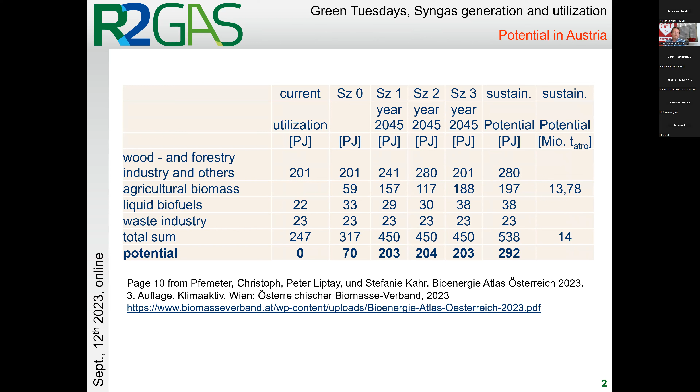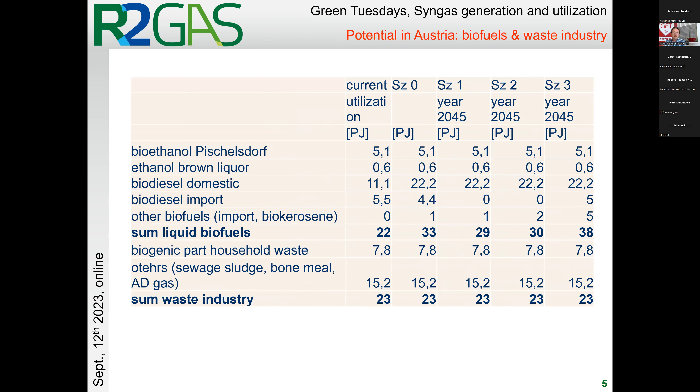The following slides are just details. This means the sectors are shown here: wood and forestry, industry and others, agricultural biomass, liquid biofuels, and the detailed estimation you can see on the following slides. There's 3 slides, and the conclusion is that we can at least provide 20% of additional bioenergy in Austria.

This would mean, if you're talking about gasification, because this is the topic we have today, between 145 and 200 plants of syngas conversion plants are required in Austria. And from my point of view, that's feasible.

I took into consideration 50 megawatt plants when drawing up the numbers here, about 200 plants which can be built in Austria. This is the first section about the potential.

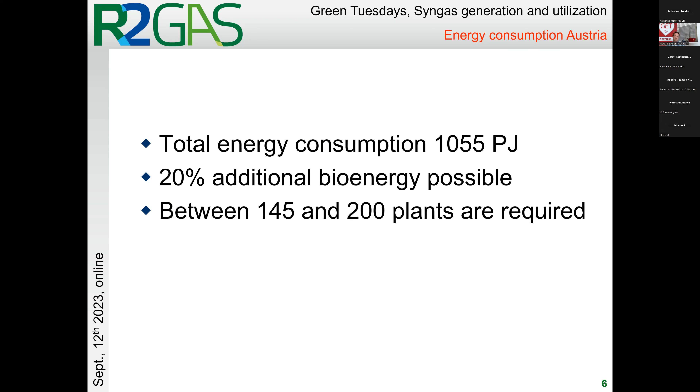The next section is about technology - interesting projects. At the beginning, I'd like to show you a slide to help you understand how it works to implement technologies. It's always about R&D.

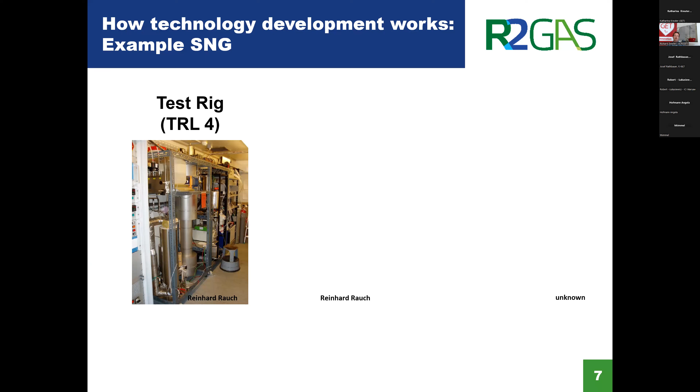If you're talking about a simple example, like the synthetic natural gas plant developed mainly in Güssing - we had a test rig at the beginning on technology readiness level 4. The next step was to build a demo plant in Güssing, technology readiness level 7, and the industrial plant was then state of the art - technology readiness level 9, which has been installed in Göteborg.

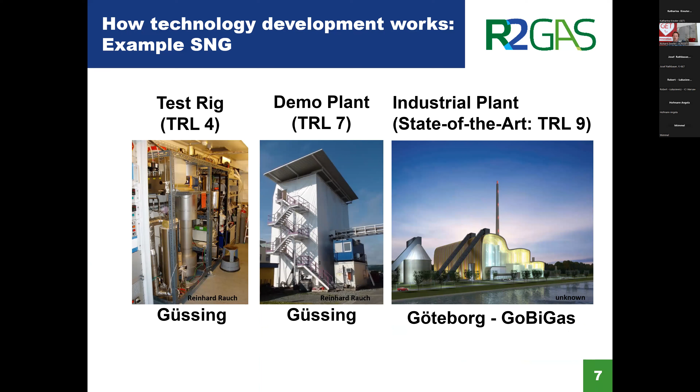If you're talking about the schedule, it always takes, let's say, 10 to 15 years once the process is invented in the laboratory until the final demonstration plant is built. In the case of this process chain from Güssing to Göteborg, we had rather good luck because it was financed. Usually, for other technologies with ideas at least as good as the SNG idea, we have to apply 3 or 4 times in Horizon, and there's a delay of 4 or 5 years for each project stage. So if you're relying on financing as available in Europe, it's not 10 years - usually it's 20 years to make a technology ready.

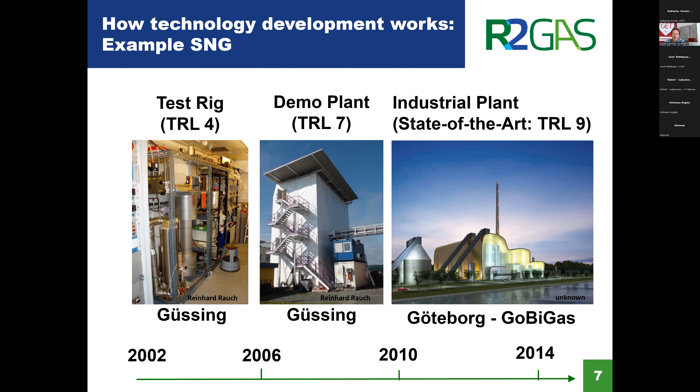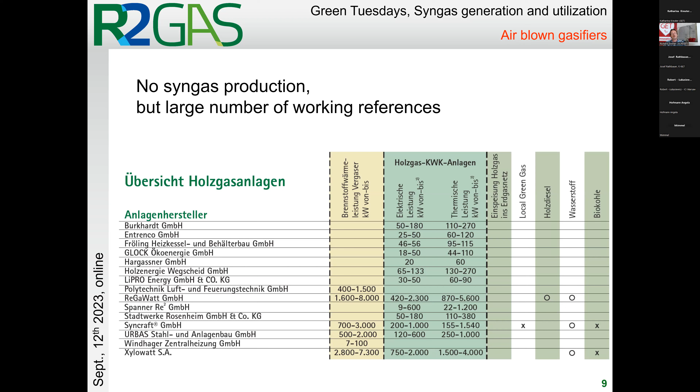Now let's come to the detailed technologies. As I mentioned before, Christian Aichernig is already in the meeting, and he will just extend something. So if I forget some information, or if you find something useful is missing for the audience or our colleagues, please make a break and add this information, Christian.

One plant worth mentioning was the Agnion plant. The idea was interesting - it was about heat pipes which transfer heat into the gasification zone, a lithium-based heat pipe where heat has been collected in the combustion zone and introduced to the gasification zone. It took some time until this plant was installed. For this reason my idea was also to make a summary about the previous technologies and the still existing technologies. Of course it wasn't possible to include every plant.

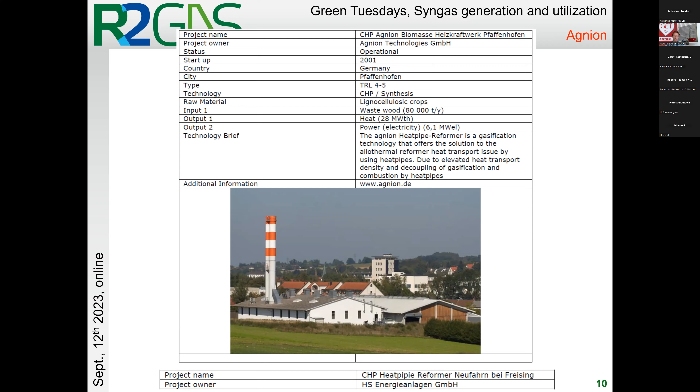The latest development in the field of dual-fluidized bed technology has been the plant in Wien-Simmering from Bioenergy and Sustainable Technologies, built by SMS Simag. For my personal part it's a very sad development, because the site in Güssing has been shut down and all the equipment moved to Wien-Simmering. But it was a good step for the technology, because what was demonstrated at a small site in Burgenland for just 4,000 inhabitants is now demonstrated in Vienna. I think it's a perfect site, because the wastewater treatment plant is included there, also the AD plant. And BEST is now really speeding up with demonstrating technologies like Fischer-Tropsch.

We had a common EU project, the Horizon project, where we installed the first continuous aqueous phase reforming reactor all over the world in Wien-Simmering, and made a successful demonstration of the entire process chain, combining the dry route from gasification with the wet route, where we can process nearly everything via hydrothermal liquefaction combined with aqueous phase reforming. So for this reason, research is expanding a lot in this field.

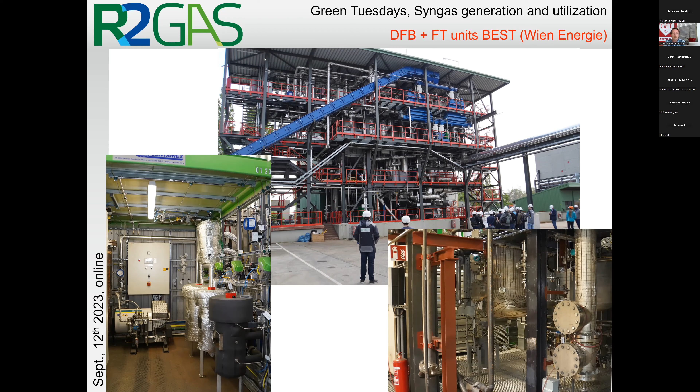Another example, maybe not too well known, is listed in the publications of the Austrian Biomass Association - the plant in Nongbua. This was from one of our close cooperation partners, Güssing Renewable Energy, and it was a successful demonstration in Thailand of a combined heat and power plant.

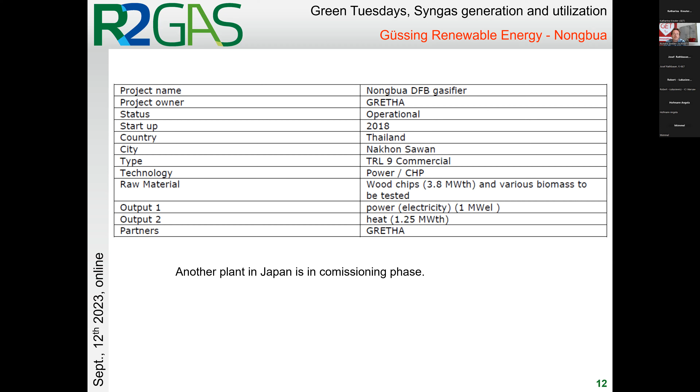Güssing is maybe known, as I said, it was a very good research site. Infrastructure in Vienna isn't still as good as it was in Güssing for carrying out experiments, but it's not worth complaining, because that time is gone.

What needs to be mentioned is that it was a successful project, because sometimes people ask me if it's in operation or not - it's not in operation, of course, but it was in operation as scheduled: a very smooth startup, then more than 7,000 hours of operation a year, and finally the shutdown after the border conditions changed. A feed-in tariff had been granted, and then it wasn't granted anymore. It's a rather complicated topic - some kind of political decision not to extend it - but it doesn't matter, because it has been paid back completely.

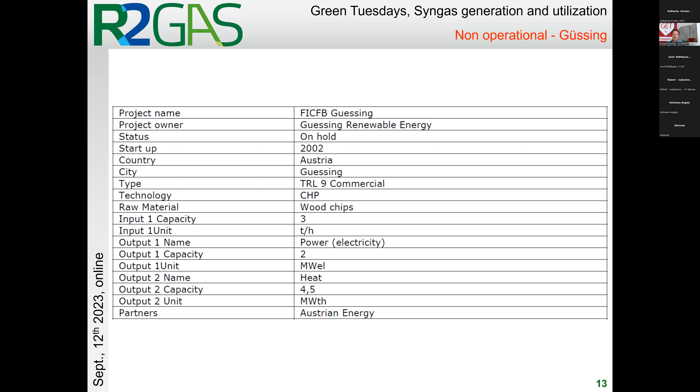There have been a lot of research projects carried out, and more than 100,000 hours of operation on the gas engine. So it was a demonstration plant, but it was operated like a commercial or industrial plant. For this reason, it's a rather good success, the project in Güssing.

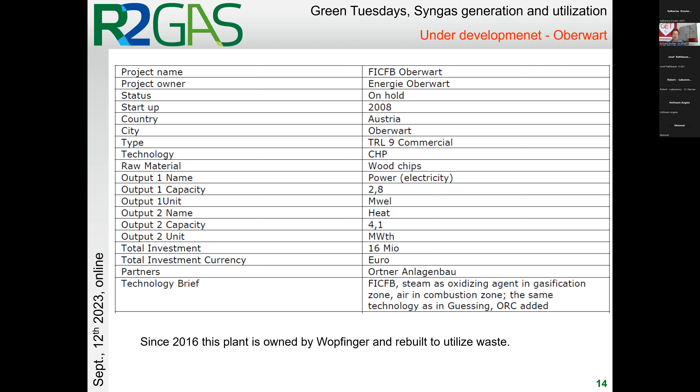The same is with Oberwart. Oberwart is now currently being converted by the owner into a syngas production plant for the cement industry, so I would like to say this is also a success. What's also important is that they are now aiming to utilize waste - this was a fine project.

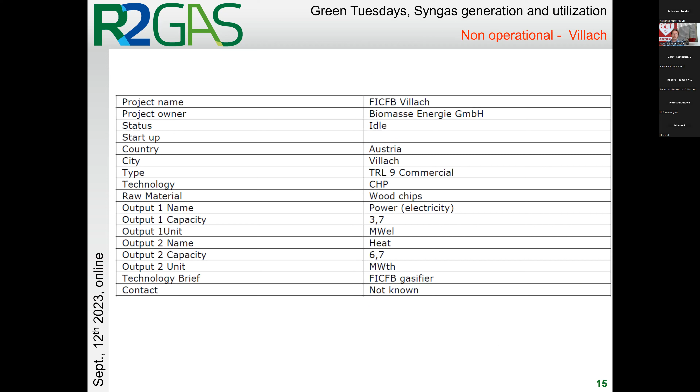There's another plant built in Villach. The Villach plant was bought by the same owner as the Oberwart plant, and was also a successful project.

The same has been with Ulm - the final result wasn't quite as sparkling, I would like to say, because I think, Christian, at the end it was something like they haven't been focusing on gasification anymore. It was some kind of converting into maximum heat and electricity production.

Yes, the main problem of the Ulm plant was that the feedstock was not really available in the region, so it became more and more expensive, and at a certain point it was difficult to have an economic basis for further operation of the plant. It's sad, because the operators were very, very good, and they even founded a company to promote the gasification technology. There was a shortage of feedstock, and they tried to use biogenic residues too, but it was too expensive in the end.

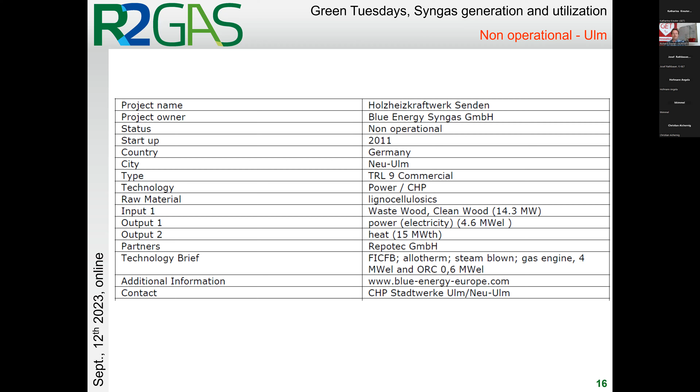Then a rather interesting project of West Biofuels - I think at the moment there's nobody in our meeting from West Biofuels, because they said they will watch the video afterwards. But there's been a rather good cooperation with West Biofuels over the past 15 years or so, based on collaboration between universities - the University of California, Davis and the Vienna University of Technology. What they did was install a dual-fluidized bed reactor already in 2007.

Then there was also some kind of know-how transfer - this was the good thing about the open innovation strategy. I think this is also a good point to thank Professor Hofbauer, because he has published so many things, and this is a main basis for why this technology can now be commercialized - a lot of details have been solved and published, and this helped all the people involved in this research.

The situation in California is somewhat different, because the agricultural industry is different, and they're using almond shells for instance. But it's going well there, and what they're doing now is starting a new project, but it's too early to mention it here.

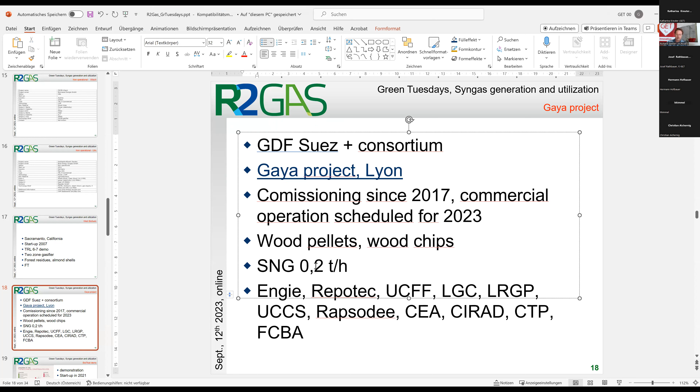My information is not right, because I'm talking about SNG 0.2 ton per hour, so this means it's 0.2 tons per hour. Sorry, I just picked it from the internet. Sometimes it's hard to find the information, and I haven't been involved at all in the Gaya project. I just heard about it.

And then some other plants where I've been facing the same situation, hardly finding information. In most of the plants, I don't know the active people there, and I haven't been there. For this reason, my information is mainly limited to what I took from the IEA task report and also from the internet.

One of these plants has been the BioTfuel demo plant, and they claim startup in 2021, aiming mainly for sustainable aviation fuels. From my point of view, it's a rather potent consortium, but the technology itself is rather conventional - the Fischer-Tropsch reactor in combination with gasification afterwards for fuel production.

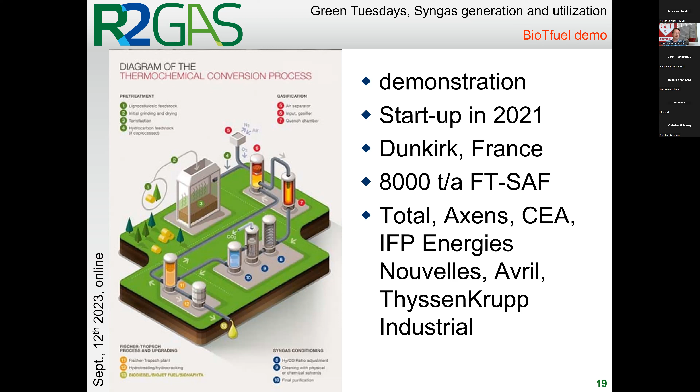Then I found the Fulcrum BioEnergy plant, or the Inentec Sierra Biofuels. As I said at the beginning, if you receive the presentation, just click on the links and you can access the information available there. This is the Fulcrum BioEnergy website, located in Nevada, based on the plasma enhanced melter. This used to be rather interesting for me, the plasma gasification - they are aiming at waste gasification, about 90,000 tons, and the production of ethanol.

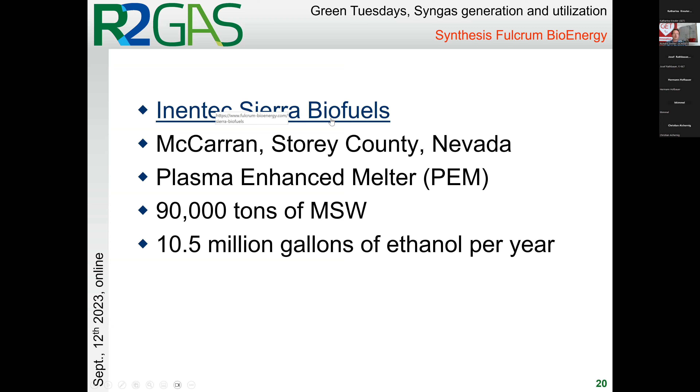Then I found another project connected to the plasma gasification facility, located in Riverbank, also using the Inentec gasifier, doing the gasification and afterwards the conversion of the syngas.

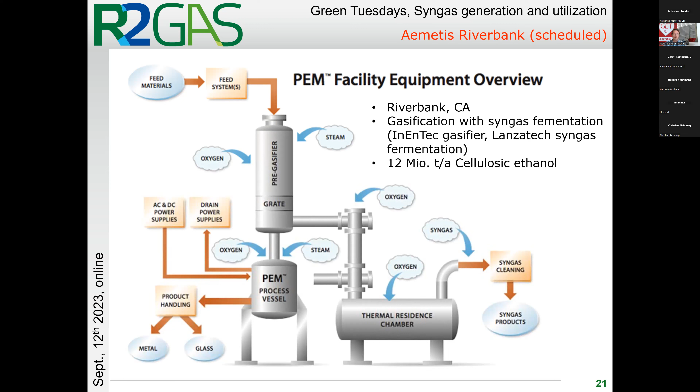Another interesting consortium from my point of view is the Enerkem consortium, which are linked to them, or I don't know - they are doing bubbling fluidized bed gasification. In previous projects, I found that they had air gasification, meaning no syngas production, and they are now shifting also to oxygen gasification.

This is one thing I would like to mention, maybe interesting in terms of the general overview about the direction gasification is going. This is a rather new development - oxygen is now available, because one main reason for developing the dual-fluidized bed gasification system was not to be dependent on oxygen and to introduce the energy within the reactor there. Now, due to fuel cells or electrolyzers where hydrogen is produced, oxygen is in some cases a waste product, and if the oxygen is available, it makes sense again.

The funny thing is that VTT used to develop the oxygen-blown gasifier before, then they shifted to the dual-fluidized bed, and now it became interesting again. But these two approaches, I think, are rather interesting: oxygen gasification, and of course dual-fluidized bed gasification, which is already at a rather high technology readiness level.

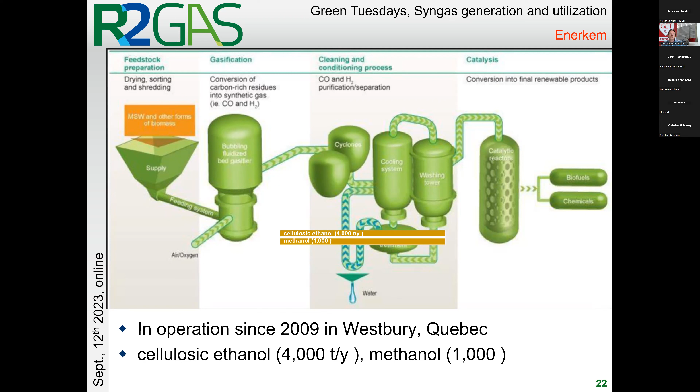The Sherbrooke facility was installed in 2003, but as you can see here on the operation hours, it's just 4,000 operation hours until 2022. This means it's one of these facilities operated in campaigns. Nothing wrong with that, but it's a difference compared to developing a technology for commercial plant use, like we aimed in Güssing, to have a maximum number of operation hours, versus running campaigns.

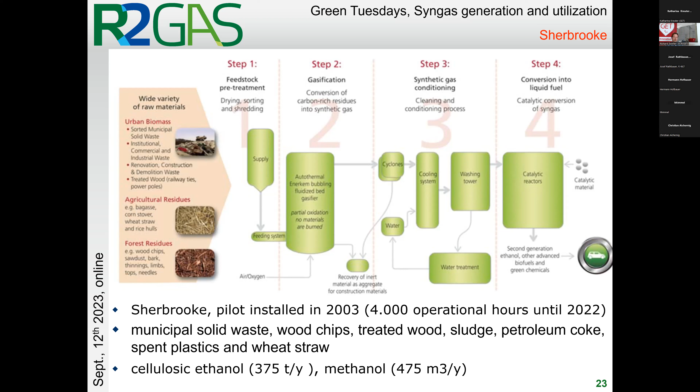The good thing is the feedstock variety they are applying in the Sherbrooke plant, and the main products are cellulosic ethanol and methanol.

Another Enerkem project is the Edmonton Waste to Biofuels project, and the aim is also ethanol production and utilization of municipal solid waste. This means waste gasification, and it's a rather large scale in Edmonton because they're aiming for 100,000 tons a year.

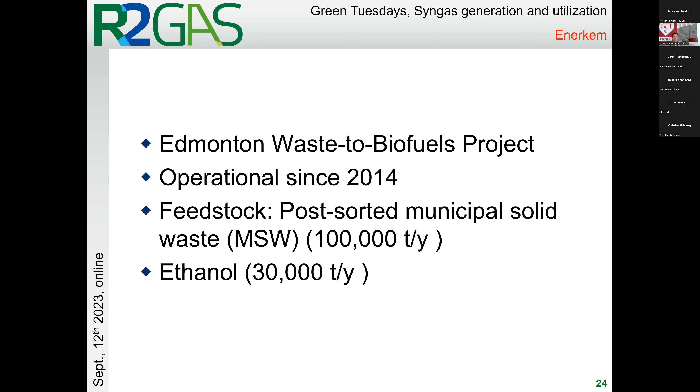Another major player I would like to mention is the GTI, the Gas Technology Institute. They are active in this field for decades, and sometimes they include the most capable partners in rather huge consortiums, cooperating with ThyssenKrupp and so on. The Velocys Fischer-Tropsch technology is one of the most advanced, and also using the Carbona gasifier from Andritz, I would say it's a most industrial application and very mature technology.

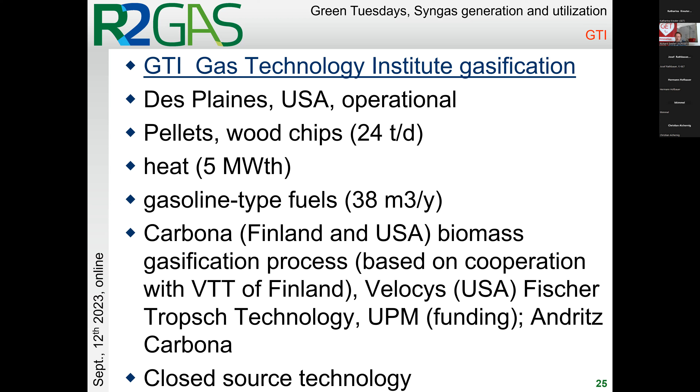And they have installed different plants. One of them is in the USA, and they're using wood chips as feedstock, and they're producing fuels. We have cooperations with most of these companies, but it must be clear that it's not an open innovation, it's a closed source technology.

There are different other developments ongoing at the moment. It's about the plasma gasification from Advanced Biofuels Solutions, and they have installed the GoGreenGas bio-SNG demonstrator. You can find this information when you click on the link there. One rather large scale plant has been installed in Swindon, utilizing household waste for the gasification. For me personally, it's also one of the most mentionable projects, a kind of lighthouse project in this field.

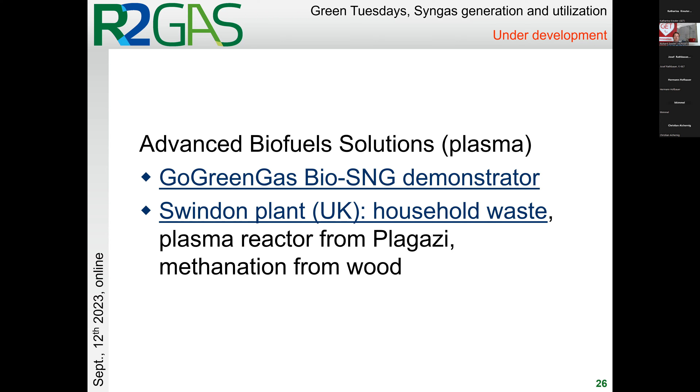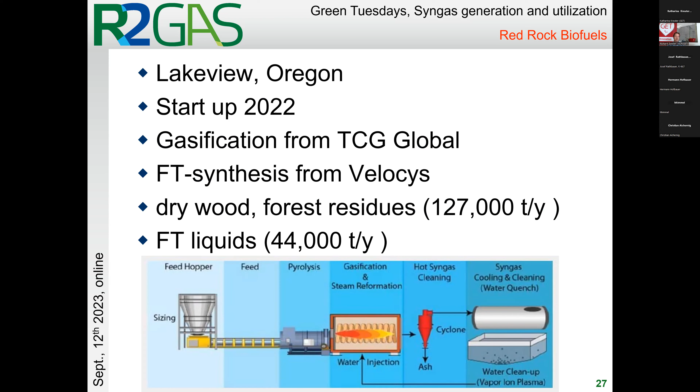Another mentionable approach is Red Rock Biofuels. It's located in Lakeview, Oregon. It's also in cooperation with Velocys, and uses dry wood or forest residues in a significant amount - 127,000 tons a year - with the main goal to produce Fischer-Tropsch liquids.

Another mentionable consortium is around the ThermoChem Recovery International project, located in Durham, USA. It's still on a rather low technology readiness level, and the goal is to produce Fischer-Tropsch and mixed alcohols.

This is a rather hot topic at the moment, because I received some calls from our utility companies because they would like to avoid the same situation as it used to be in the field of anaerobic digestion some years before, where the feed-in tariff was a little higher than the costs of the AD plant. The manufacturers optimized the systems and installed rather large AD plants, and for this reason people are now rather cautious about the height of the feed-in tariffs.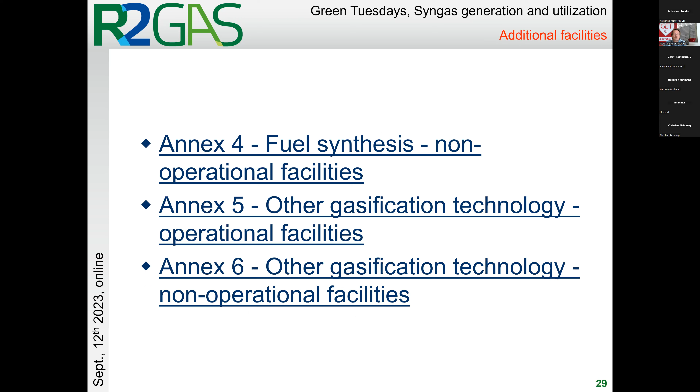Yeah, I think this was important missing information because these are also successful projects and define the state of the art that we are facing now. The participants of this meeting have been involved in many of these projects, so I think it's good if we give an overview of the current state of the art, and my idea was also to refer to other projects which hopefully will come up.

If we are talking about 200 gasification plants already in Austria, then you can imagine how many gasification plants are feasible all over the world. I've done a recent study in Nigeria some years before, and alone in one state there could be more gasification plants installed than in Austria, and there are more than 20 states in Nigeria. So hopefully the other consortiums will succeed, and we will have more gasification plants soon.

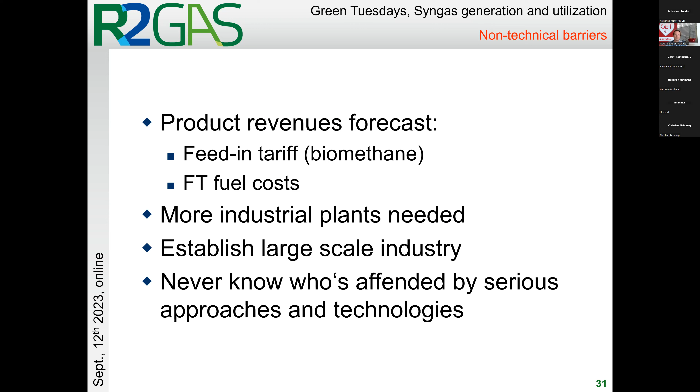The technical barriers are smaller from my point of view, and I would say it's not even worth mentioning, because these are small details we resolve during development. One of the most interesting parts is always the feedstock definition. This means, on one hand, the quality—there's always a discussion about the interface between the supplier and the plant, the consumer itself, and also about the long-term availability of the quality.

For this reason, from my point of view, it's important at the beginning to sit down and define a worst-case scenario, and to have good collaboration between the suppliers and the consumers, because otherwise, if the war starts and one party is blaming the other, then you have already lost.

So if the consumer, the plant, is blaming the supplier that the quality isn't sufficient, and vice versa, then this is a bad situation. So there should be enough focus put on the feedstock definition for negotiations, and it's also good because in this case you can talk about long-term contracts with the supplier. I think this is another reason to go into the biomass business, because if we watch the prices during the past years for electricity and natural gas, everybody knows what happened.

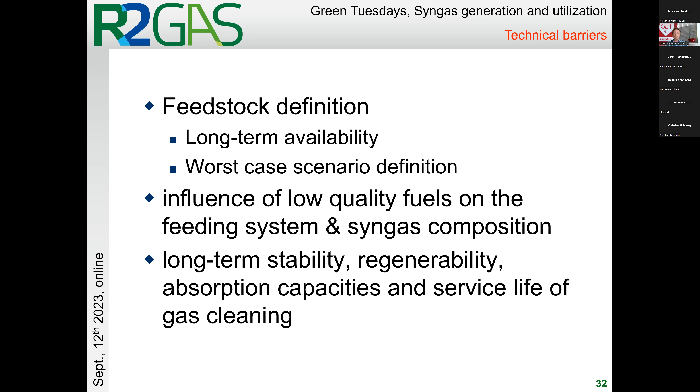As you see, maybe you can point out some barriers afterwards if I missed something, but it was really hard to find out which barriers exist.

So for this reason, I would like to come to the conclusion that the rollout is possible. There are different initiatives going on at the moment to install a series of plants in Austria. From my point of view, what we have done during the past is have some kind of open discussion. So sometimes open innovation isn't possible, but at least a cooperation between competitors is beneficial for everybody.

And the other thing is optimization of the entire value chain. From my point of view, this is one of the possible barriers, and this can be overcome with transparent information, because otherwise the feedstock supplier is afraid that the plant operator is getting rich, and if there's no transparent information, then also the consumer of the products, the biomethane and the Fischer-Tropsch products, will be afraid that the plant operator is getting rich, and vice versa.

So for this reason, if there is transparent information, and the other thing is optimization of the value chain, because if such parameters are discussed openly, as we had before about the feedstock properties and so on, then everybody's in the same boat, and the entire value chain can be optimized.

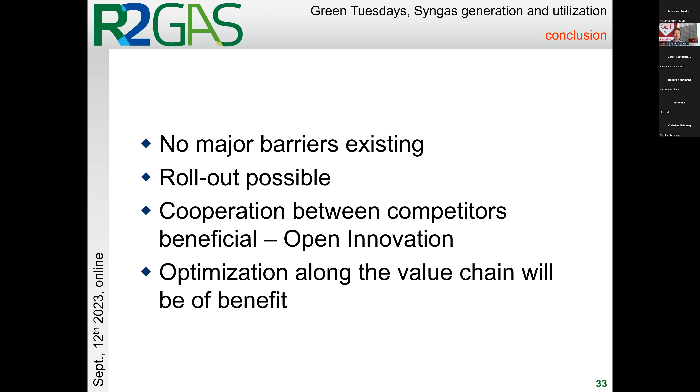Right, this was it from my point of view for this first presentation, and now we are open to discussion. I will have a look now in the chat to see how many questions there are, and then we can start to discuss details.

Katharina, I think there hasn't been any question in the chat, or has there? No, not so far, I didn't get any message.

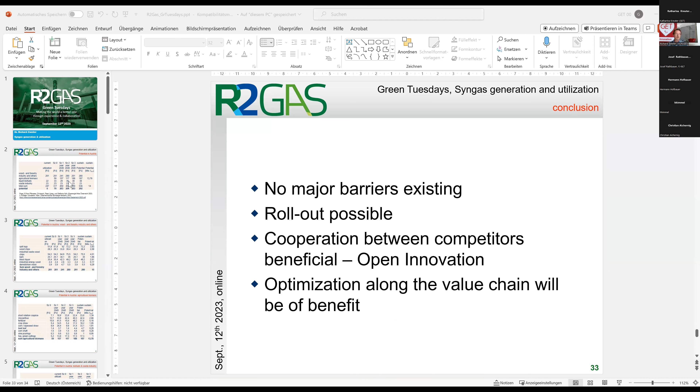That's very good if it starts slowly, because this means my presentation has either been clear or it has been completely unclear. There are just these two options.

Yeah, thank you very much for the question.

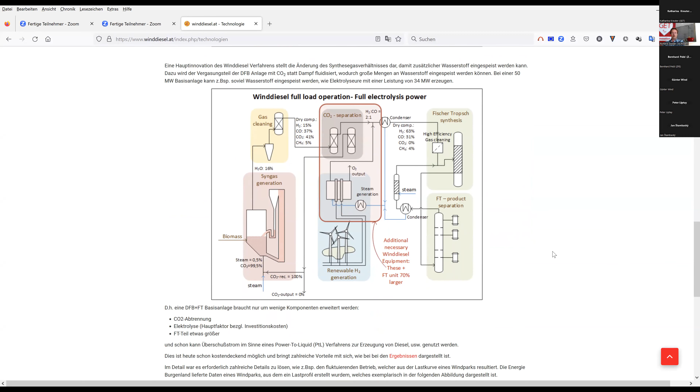Then from Christoph Rief, to answer this question, I can show you what I would like to share afterwards. When I'm sending my minutes, the biomass and power to liquid has been a project we've been working on some years before. It's already closed for some years, and this was the reason why we went into this direction, because the difference between these two processes is just the installation of the additional equipment, the electrolyzer, and having the downstream units a little bit larger. So this is the standard biomass to liquid process, where the biomass goes into the gasifier, then we've got the standard gas cleaning and the fine or high efficiency gas cleaning, and then we've got a Syngas ratio of 2:1, which is required for the Fischer-Tropsch synthesis. And this goes into the Fischer-Tropsch process and the separation.

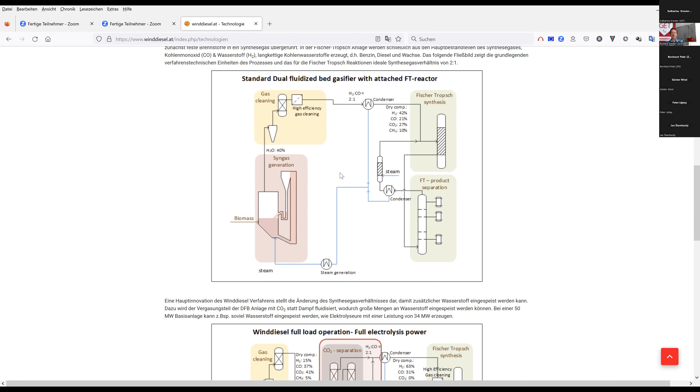If we're now talking about the combination of a biomass to liquid process and power to liquid, then from my point of view, that makes a lot of sense, because we've also been investigating some load lines. This means when renewable energy is available, let's say 2,000-3,000 hours a year, we can use this electrical energy in order to introduce hydrogen. This has been developed by Wien and their partners, so that they have the option to change the Syngas ratio, and then the hydrogen is introduced. With this, we can couple a 50 megawatt gasification plant to a 34 megawatt electrolyzer. The additional investment is just about the electrolyzer and making the downstream units a little bit larger, for 70% more product in the downstream process.

Okay, thank you very much for the explanation.

This is also connected to the things we discussed before. Maybe it's too logical and too good, that there's not really a high interest in it. So one of the main reasons why we developed the project and published it was also to make it publicly available, because it should be some kind of technology which should be implemented. And as you know, the development is always hardest in the details. We had some cooperations also with AVL and with VTT, and it's always about the details. For this reason, I'm also aiming for some kind of capacity building and know-how exchange between people who are active in the field.

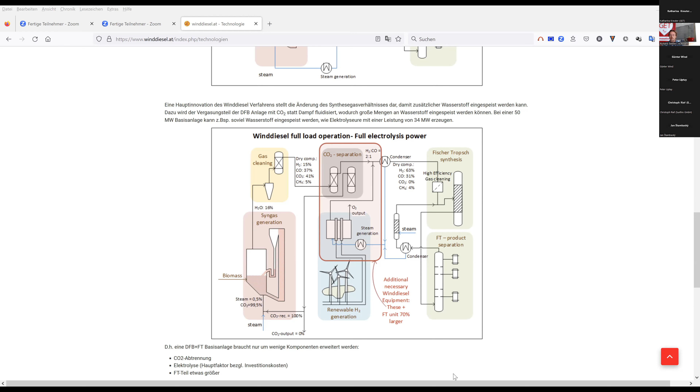Which energy projects did you mention, Günther? At the beginning of your report, you mentioned the heat pipe reformer from Germany, I think it was. Is this technology in use now, and what are the chances in the future for this technology?

Now you've placed a question which I can't answer in detail, because I don't know the latest developments. Hermann and Christian, have you heard about the latest things? It used to be a very good scientific accompanied project, but then I don't know if Agnion went bankrupt at some point, and they haven't started again. Do you know more details about how the Agnion concept continued?

It seems no. I know that Dr. Herdin has been there, who used to be a very good expert in the field. It's a similar history as other plants had, so to say. They had a demonstration plant in Germany. It was in operation for several years, I would say, but then it was closed down. So I think there are no further plants now in planning or in erection there.